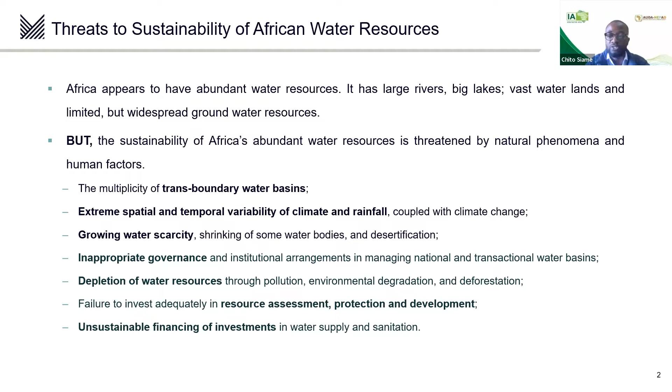But before that, just a few pointers on some of the issues faced by the continent, including water scarcity, inappropriate governance in terms of institutional arrangements in managing national and transnational water basins. Only 5% of rural Africans have access to piped water, and the level of maintenance of the existing water systems is also not sufficient.

We see a lot of withdrawal of water sources, heavily skewed towards agriculture. Think about over 80% of Africa's water is drawn for agriculture. And in recent times, if I could give an example of Cape Town, during the 3 years of drought leading into 2018, even though the agriculture sector contributed only 4% of the province's economy, during the drought period, you had 25 to 40% subsidization of the sector. And this can be applied to the rest of the country and probably the rest of the continent.

In Egypt, for instance, on the Nile, the government uses subsidized water as a means to stop extensive rural migration. Coming back to Cape Town on the topic of variability of climate and rainfall, we saw a severe once in 300-year drought in the 3 years leading to 2018. In those years, there was a 27% decline in water stored in major dams. And this was exacerbated by the province not investing sufficiently given the increase in population. So you had an increase in demand and a severe drought hitting the province.

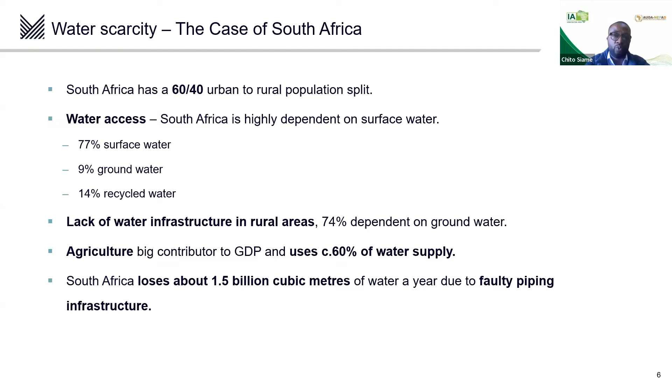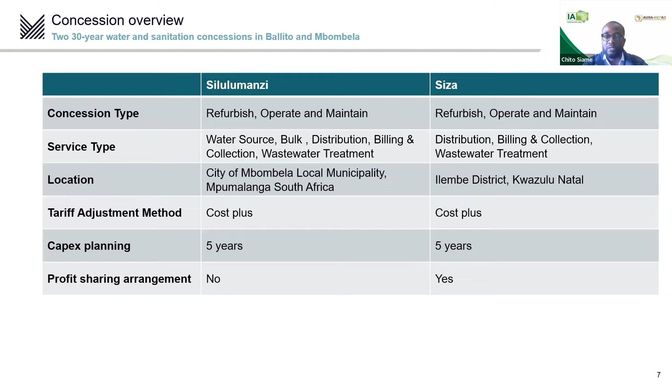So what we have been able to do through our funds is invest in 2 concessions, Siza and Silulumanzi, based in KwaZulu-Natal and Mbombela in South Africa. And I'll take you through just some of the lessons that we've learned investing in these concessions in terms of improving supply of water, reducing wastage, etc. So the 2 concessions were a 30-year concession started in 1999, and they basically refurbish, operate, and maintain. So we will be handing them back to the government in the next 7 years.

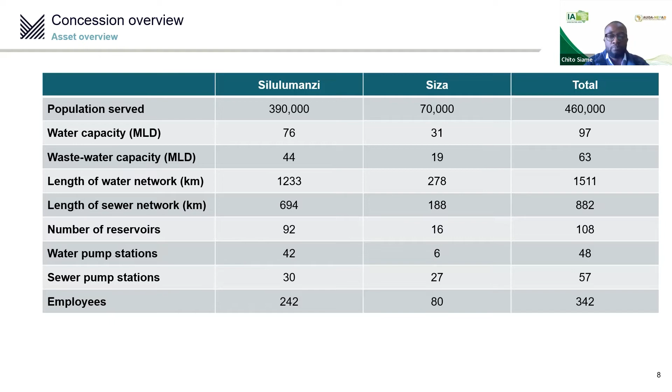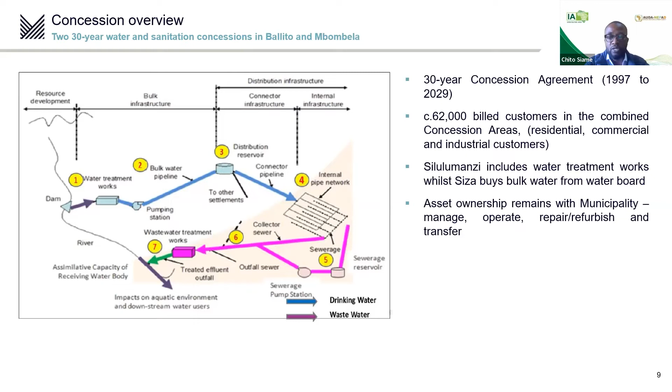Basically, they serve a population of 460,000 people, pipeline networks of over 1,500, but with water losses drastically reduced. But this wasn't always the case. I'll just show you now some of the measures that were put in place to improve the water losses. So at the time of inheriting the Siza concession, for instance, which is based in KwaZulu-Natal, South Africa, you had 50% water losses. So basically you would take water from source and 50% of it was lost before it went into communities.

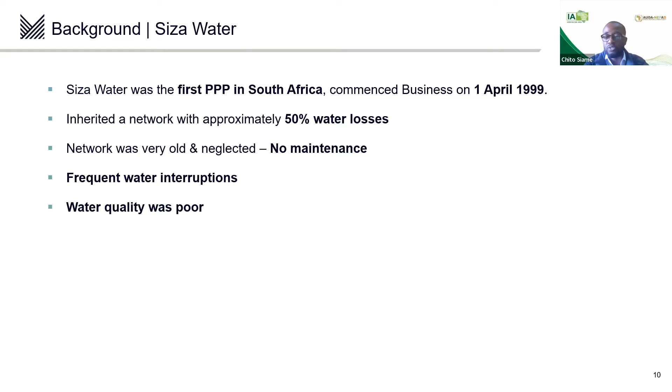And a number of measures had to be put in place to ensure that this is reduced to the 10 to 20% that we see today. Basically, the network was very old and neglected, frequent water interruptions, and the quality of water was incredibly poor. And the main measures, if they could be summarized, were starting to collect data and focusing where you apply resources to improve the supply. So logging pressures and flows, pressure management of pipes to avoid bursts, inspecting leak detections, and monitoring budgets.

You can't replace all of the pipeline at once. So the key driver for replacement of pipelines became burst histories, just knowing where the bursts were happening and where you were at risk, and applying resources to those areas. Managing pressure to avoid bursts.

So installing VSDs, variable speed drives, on the pumps, not overloading the pipelines during the day. And collecting a lot of data for water losses. So you need to know where you're losing water and why.

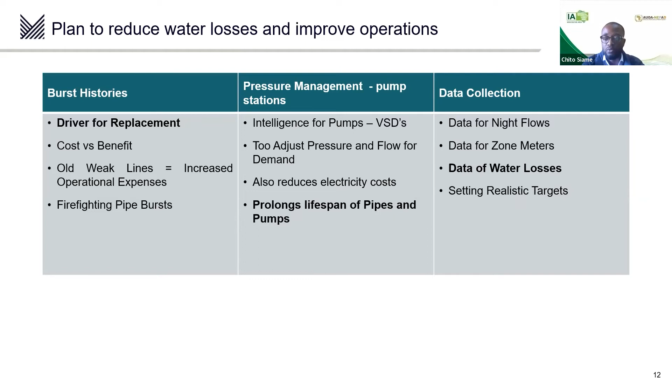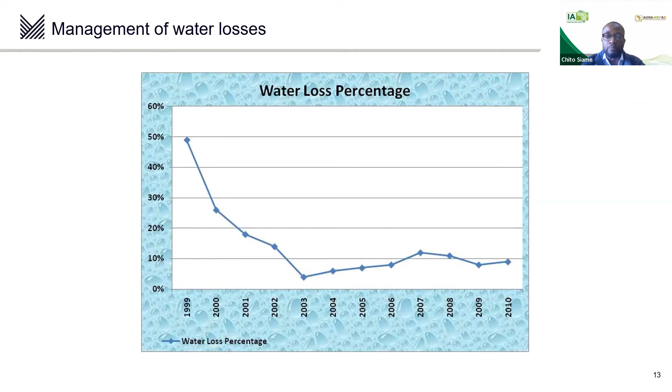In addition to maintenance of the network, the concessions have experienced other challenges, including drought. For Siza, the sole source of water since 1999 was the Hazelmere Dam. And if you recall, in September 2014, we saw the dam coming down to critical levels because of El Nino. And the concession company had to respond.

And basically, when these restrictions came out, there were considerations on what the best response should be: boreholes, river extraction, or desalination. And all of these, in one way or another, came short of what was needed. The amount of water that you could produce from boreholes was insufficient for the number of people in the area. And the cost of taking water to the communities using tankers had ballooned with no corresponding revenue for it.

River extraction was not sustainable during the drought, and desalination as an option was too expensive, but also we had to consider the high operating cost going forward. And when your water comes back to you, you mothball the plant because it's expensive to maintain.

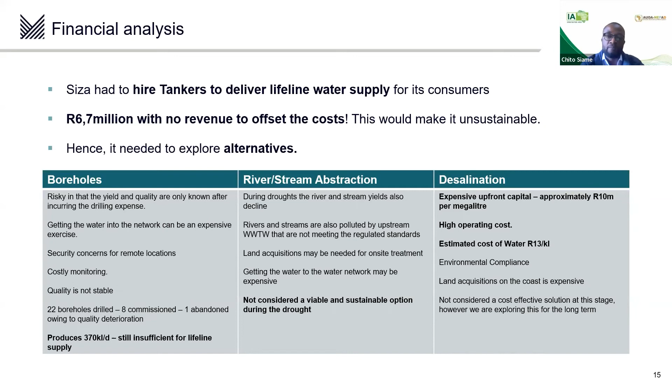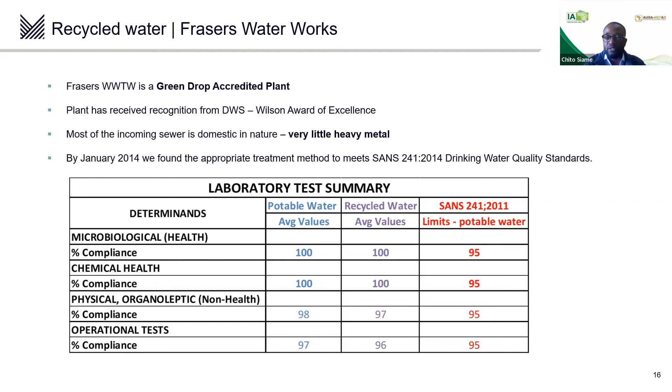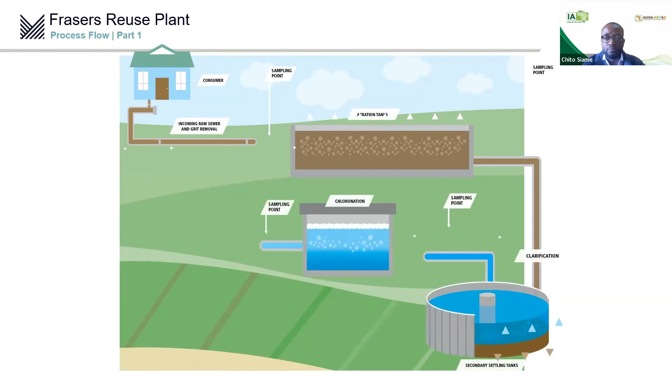So a very efficient way to supplement the river water that we use to supply to the communities. And this is just a diagram showing what the plant looks like. If I could move, this is what it initially looked like. 97% of homes participated in surveys and were okay with the reuse of water. So a lot of community buy-in. It's a simple arrangement, as you can see, doesn't take up too much space.

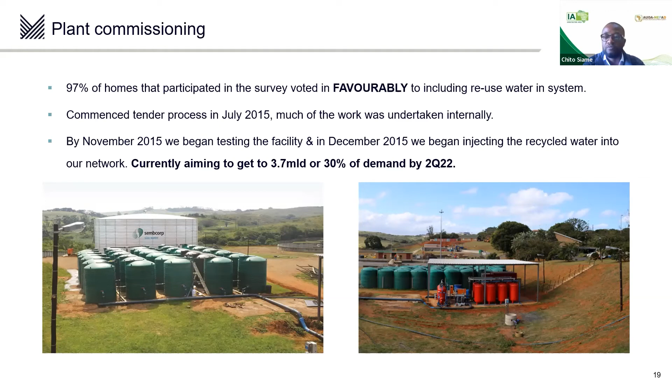And this should eventually replace about 30% of demand by mid this year. So very sustainable. We're just using water that we already have coming out of the sewer system and back into the communities.

So in conclusion, I think you could say that these public-private partnerships can work for the sector. We've seen improved water losses at operations versus the rest of the country, higher efficiencies leading to cost reductions and better service delivery, not just to indigent customers, but to all customers. And it's a more sustainable model.

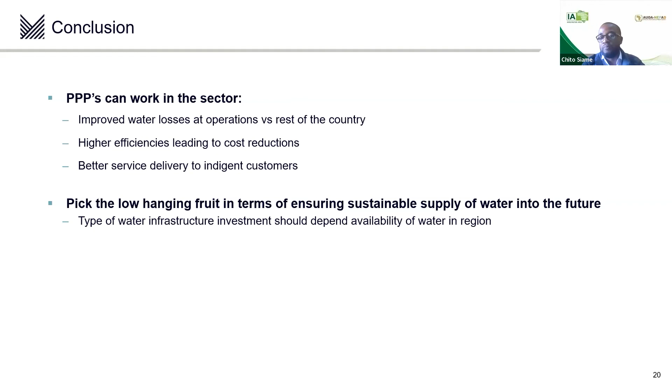And I think that picking the right technologies for the different regions, not just in South Africa, but the rest of the continent, contributes to a sustainable supply of water. And that's our presentation.